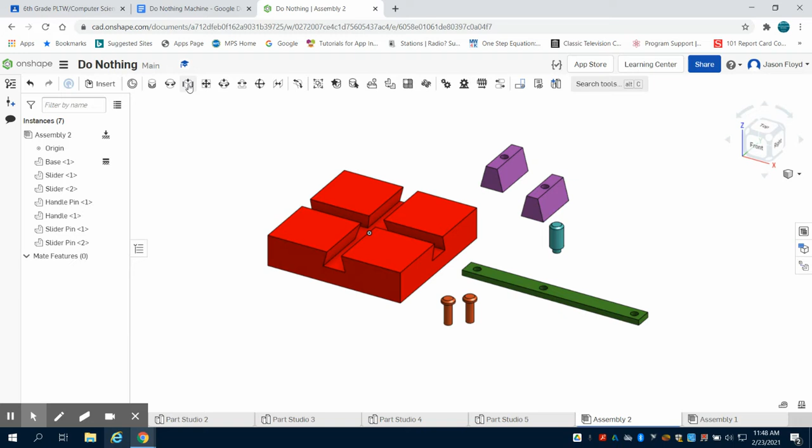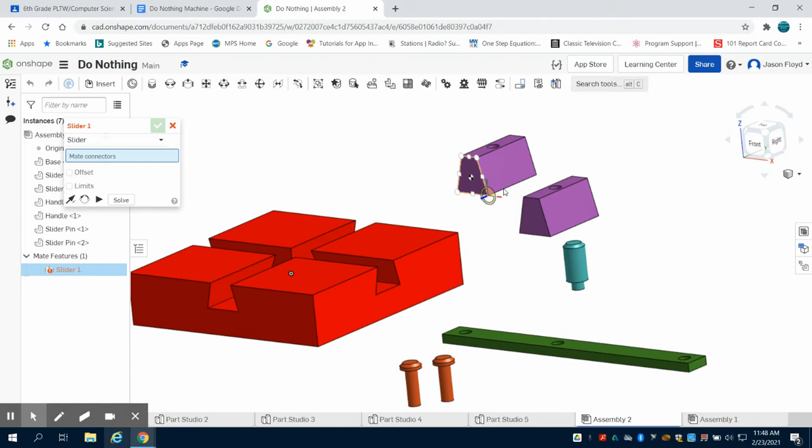Now that we've imported all our parts, and remember this base we fixed in position, I'm going to come up here and grab my slider mate. I'm going to choose the center point of this side facing me. So let's get my angle just a little bit different, see if I can grab that. There we go, the center point there.

And what I want is the corresponding point here of this face. And again, facing me. There we go. And I'm going to green check mark that. And what you're going to see is this piece now slides here.

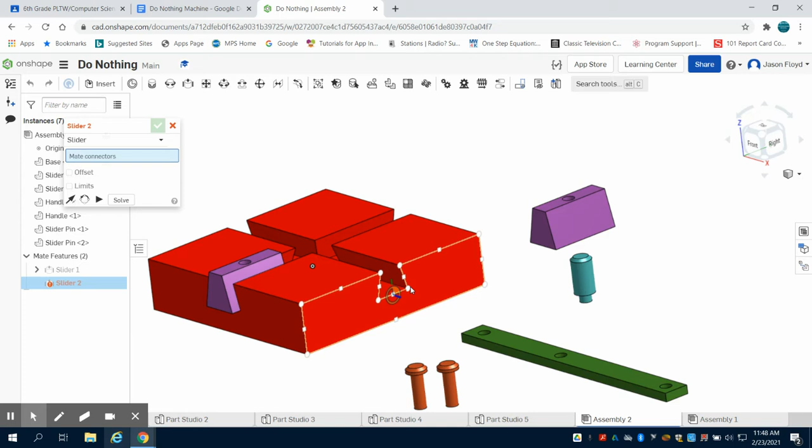I'm going to do that same slider constraint with this point right there on the opposite side to this same here, the corresponding points. And again, I can green check mark that.

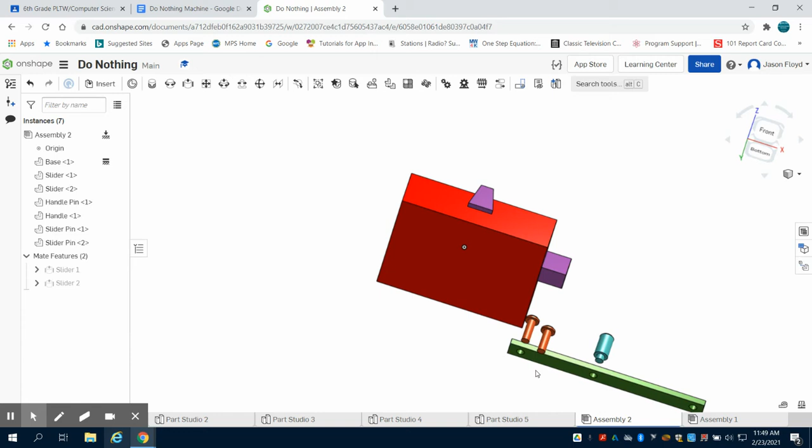The next thing I'm going to do is I'm going to grab my two that are closer together on this side of that handle, and I'm going to come down here. I'm going to go to the bottom side, and I'm going to come to my revolute mate. I'm going to choose the bottom face of this center hole to the top face of this hole on the slider, and I can green check mark that.

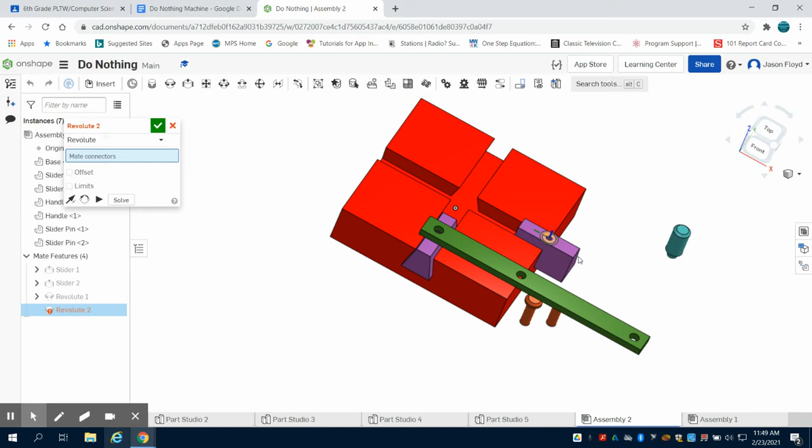I'm going to do the same exact thing with a revolute mate here, choosing the top portion of this with the bottom of that hole right there. And again, I can green check mark that and solve that. So we can see as we're now set up that they align, and both of those are revolutes.

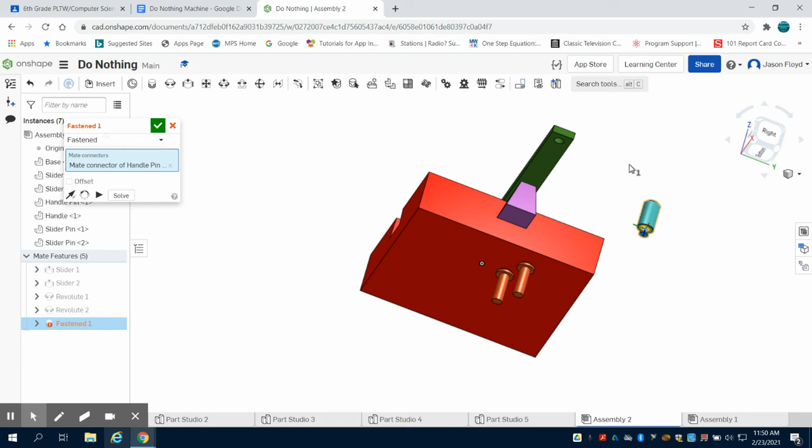Now I'm going to do a fasten mate to the bottom of this circular face, to the top of that circular hole for my handle, green check mark it, and I'm going to do the same thing with my pins, that bottom face right there to the center point, to the top face of that circle right there, and the exact same constraint with a fasten mate to the other part here.

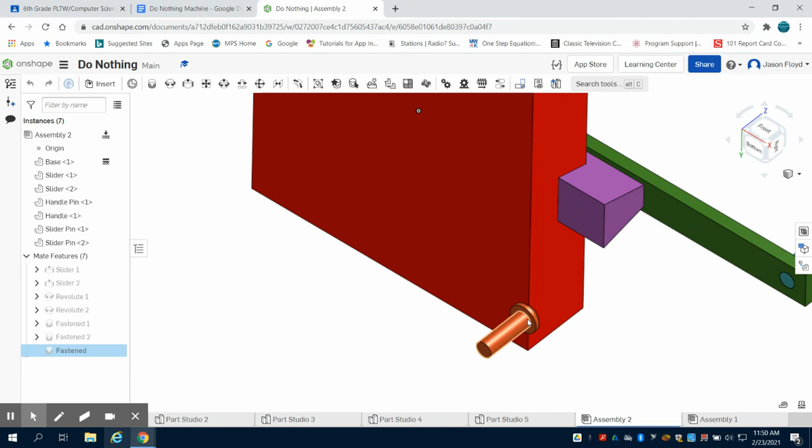Fasten mate, choose there to this top portion of that circle there, green check mark it, and now what I should be able to do is grab this, and you're going to see as I spin this, my machine works. We can see it slide and navigate.

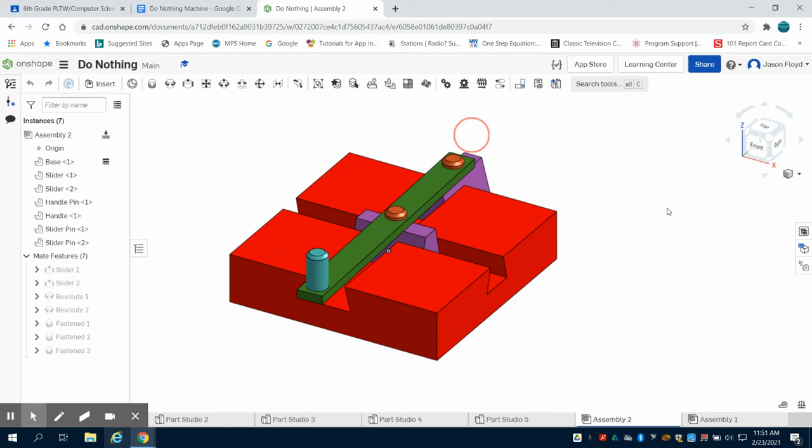So I hope this helps as we're learning Onshape and getting used to the different constraints that we can make in Onshape, and how we can put different parts together to make some simple machines using constraints.